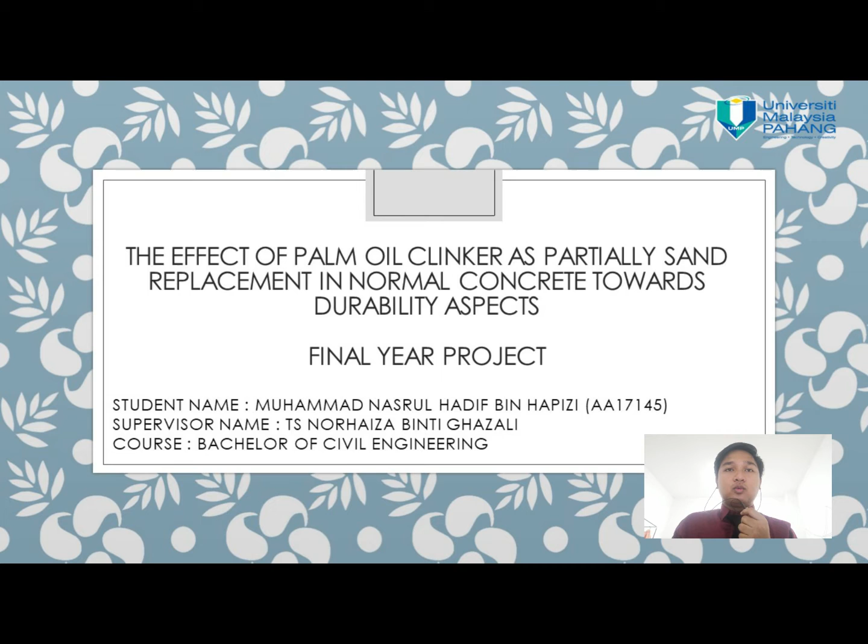Introduction. According to Mineral Product Association, concrete is a composite substance composed of aggregate mixed with water and cement which hardens with time. Commonly, concrete is used because it can improve sustainability performance of building and structure. In addition, R. Gagg explained that concrete is the second most used material after water in the world.

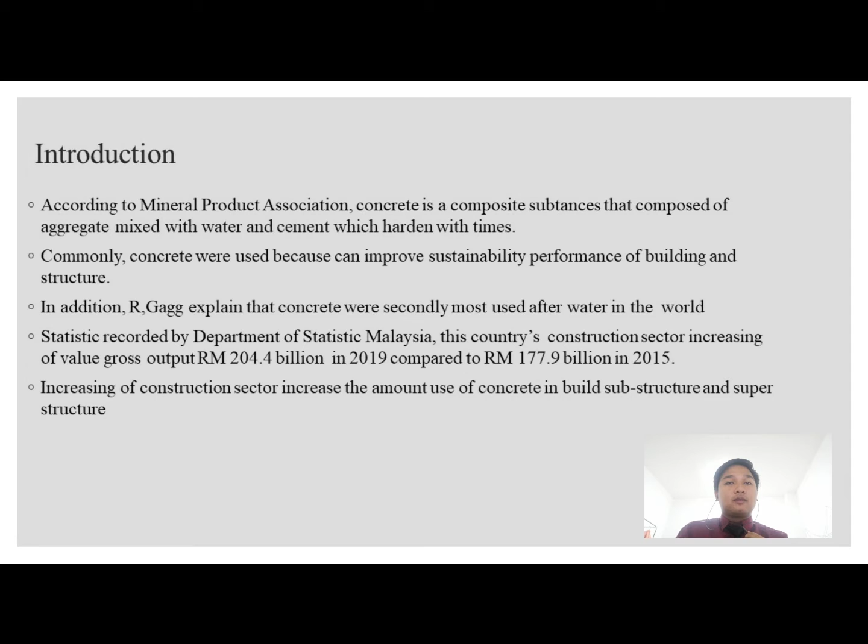Statistics recorded by the Department of Statistics show this country's construction sector increasing in gross output value, with RM204.4 billion in 2019 compared to RM177.9 billion in 2015. Increasing construction sector activity increases the amount of concrete used in building substructure and superstructure.

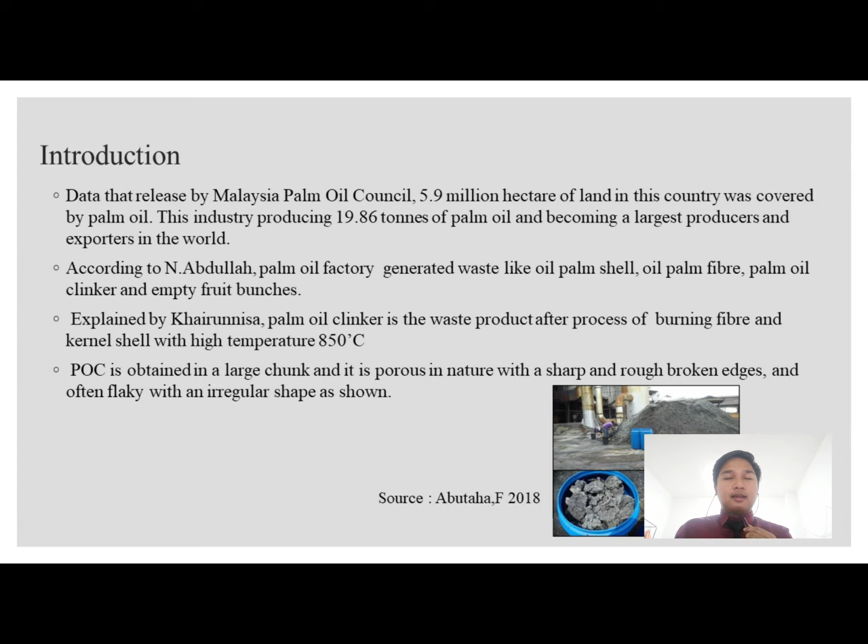According to N. Abdullah, palm oil factories generate waste like oil palm shell, oil palm fiber, palm oil clinker, and empty fruit bunch. Explained by Khairunnisa, palm oil clinker is the waste product after the process of burning fiber and kernel shell at high temperature. I use palm oil clinker as sand replacement in the concrete.

Problem statement. First is mining issue. According to Schandl, between 32 and 50 billion tons of sand are extracted from rivers for supplies around the world, and demand is increasing.

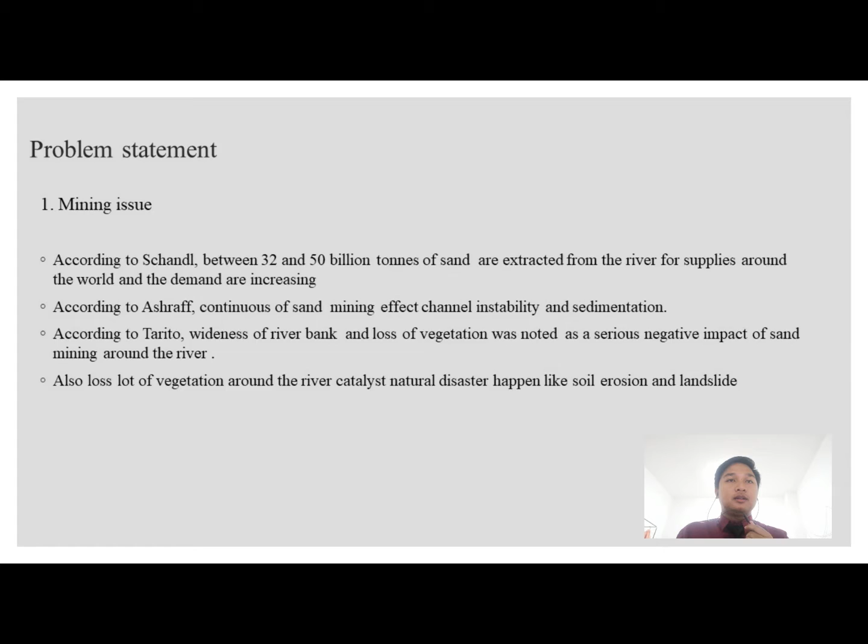According to Ashraf, continuous sand mining affects channel instability and sedimentation of the river. According to Tarito, wideness of river bank and loss of vegetation was noted as a serious negative impact of sand mining around the river. Also, loss of vegetation around the river catalyzes natural disasters like soil erosion and landslide. The second problem statement is the production of palm oil waste.

We can see at the pie chart, the oil palm industry produces 85.5% waste in this country. According to Shekarchin, excessive palm oil waste requires large space of land for storage and dumping. According to Khairunisa, innovation using palm oil clinker in concrete increases clean environment because it reduces waste in palm oil factories.

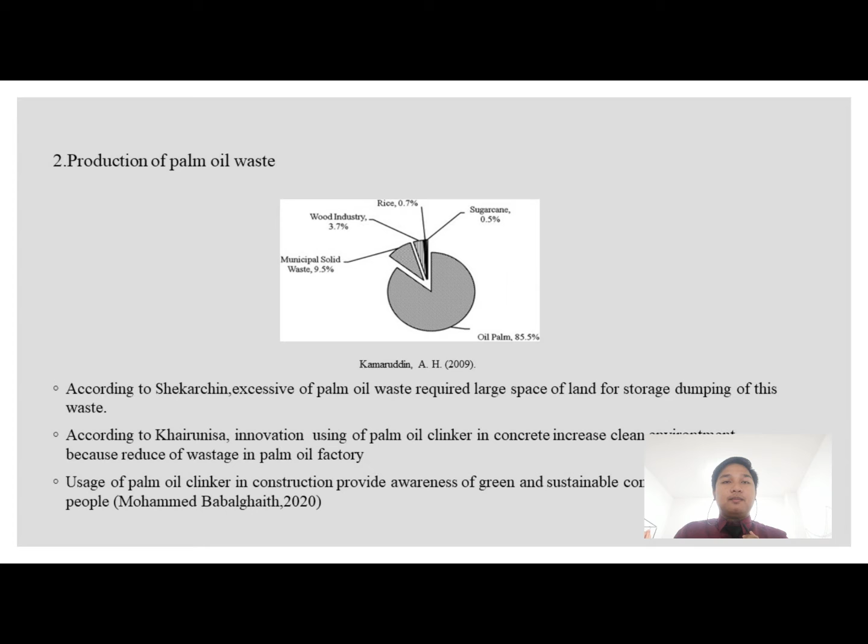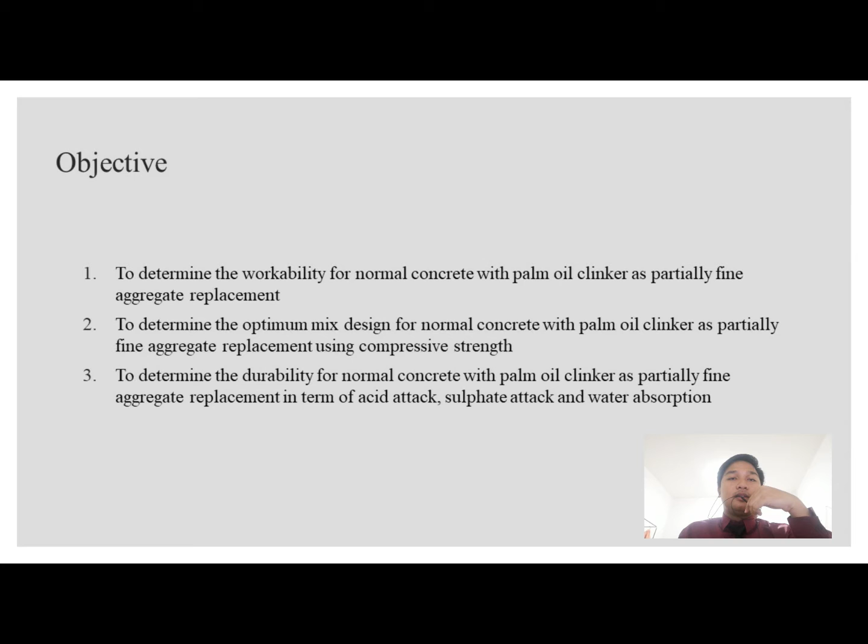My objectives: first, to determine the workability for normal concrete with palm oil clinker as partial fine aggregate replacement. Second, to determine the optimum mix design for normal concrete with palm oil clinker as partial fine aggregate replacement using compressive strength. Third, to determine the durability for normal concrete with palm oil clinker as partial fine aggregate replacement in terms of acid attack, sulfate attack, and water absorption.

according to standard in order to study workability of fresh concrete. Compressive strength test was carried out to determine the strength of the concrete and identify the optimum mix design. Acid attack test will be carried out according to ASTM C267 to determine resistance to acid. Sulfate attack test will be conducted according to ASTM C267 to determine resistance towards sulfate.

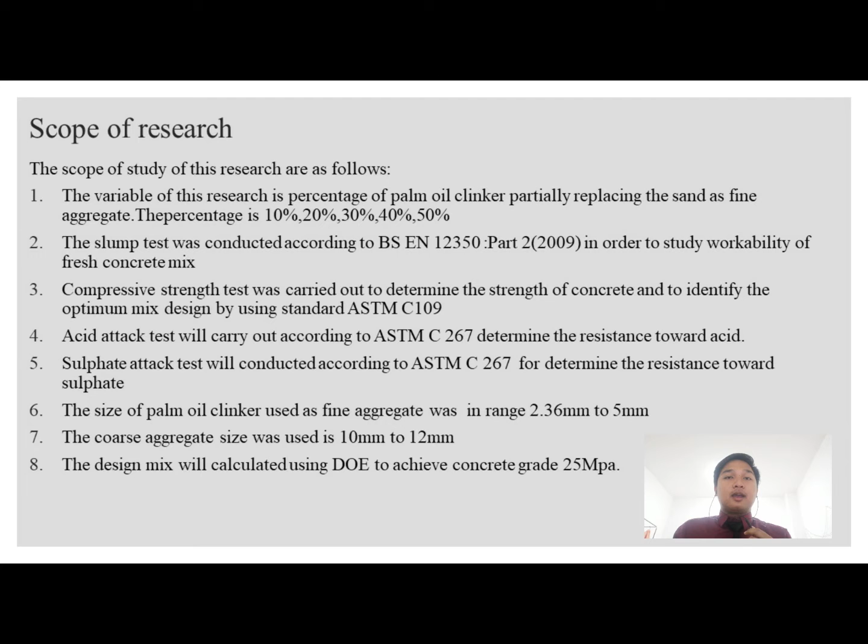The size of palm oil clinker used as fine aggregate was in range 2.36 mm to 5 mm. The coarse aggregate size used is 10 mm to 12 mm. The design mix will be calculated using the DOE method to achieve target strength of 25 MPa.

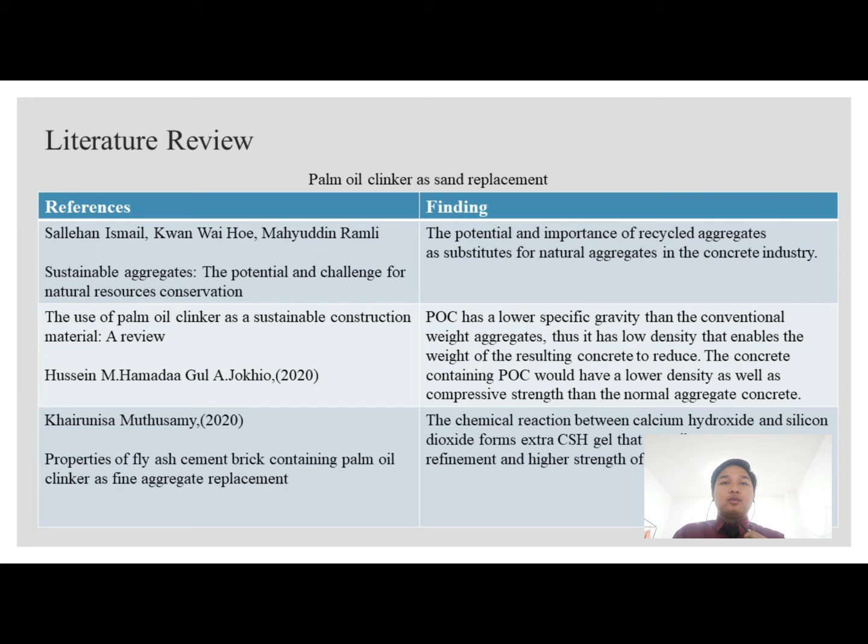Literature review. The finding I get from the literature shows the potential and importance of recycled aggregate as a substitute for natural aggregate in the concrete industry. Second, POC has lower specific gravity than conventional aggregate, thus it has lower density and enables the weight of resulting concrete to be reduced. The concrete containing POC will have lower density as well as lower compressive strength than normal aggregate concrete.

Third, POC aggregate was found compatible to be used in lightweight concrete mix proportion. Fourth, the result also showed the optimal replacement content of fine aggregate with industrial waste was 10% for oven-dried alum sludge, whereas 15% for quarry and limestone, content that improved all strength properties as investigated in this study.

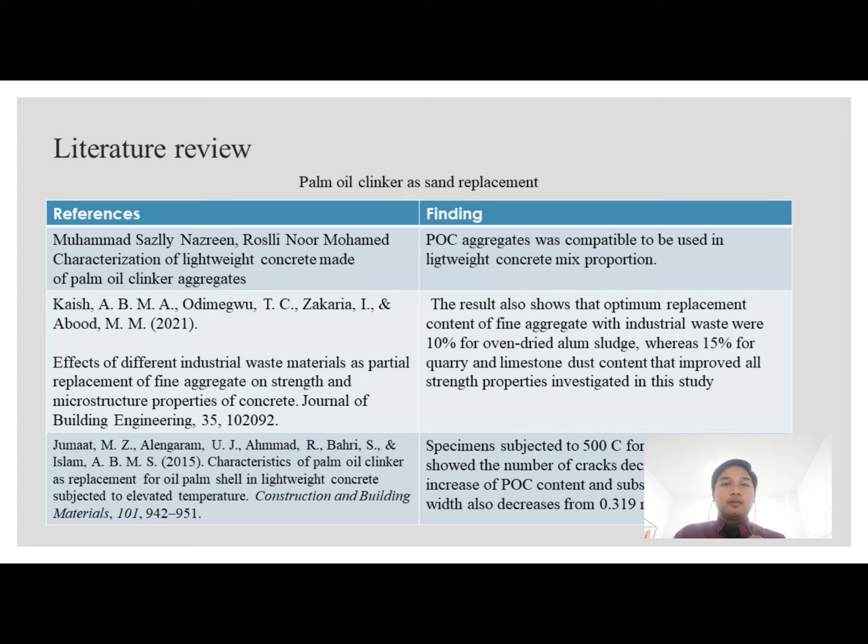For the durability aspect of palm oil clinker, palm oil clinker geopolymer mortar shows great resistance to hydrochloric acid and magnesium sulfate solution. Second, pre-treatment using hydrochloric acid will enhance the reactivity of the palm oil clinker.

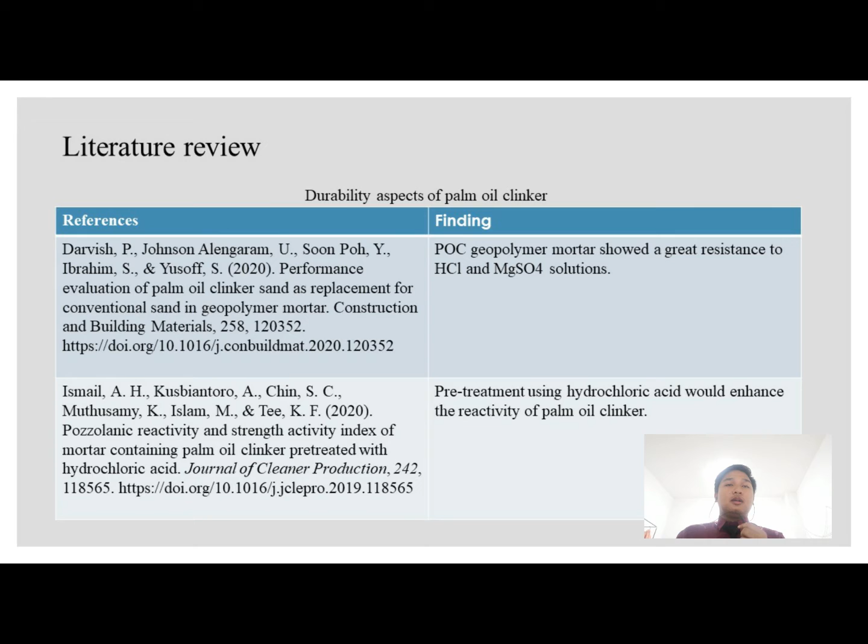Material preparation. For the fine aggregate, I use river sand. For the coarse aggregate, the size of coarse aggregate is 10 mm to 12 mm. The type of cement is OPC cement with brand YTL Orang Kuat. The palm oil clinker size is 2.36 mm to 5 mm, using tap water and the addition of super plasticizer.

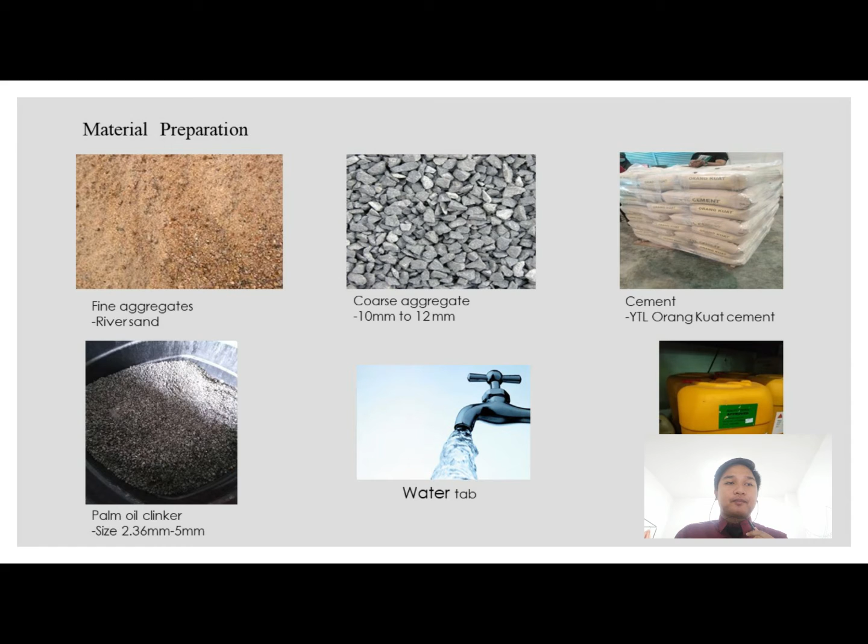Concrete mix design. The concrete will be designed to achieve target strength of 25 MPa by using the DOE method of mix design. The mix design ratio is 1 to 1.25 to 3 with 0.55 water cement ratio. This is a table of mix proportion in kilogram per meter cube.

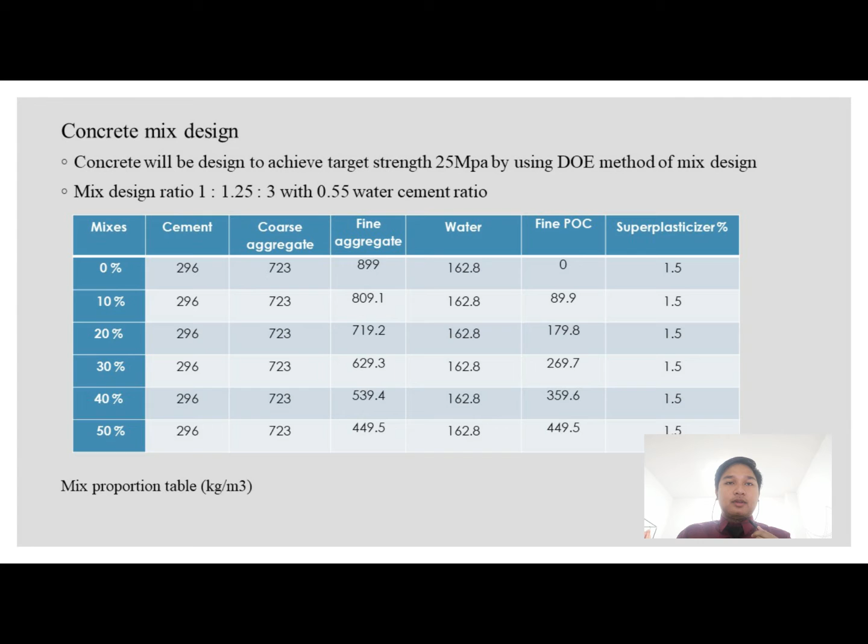This is a list of tests in my research. Firstly, the slump test, compression strength test, acid attack resistance test, sulfate attack resistance test, and water absorption test.

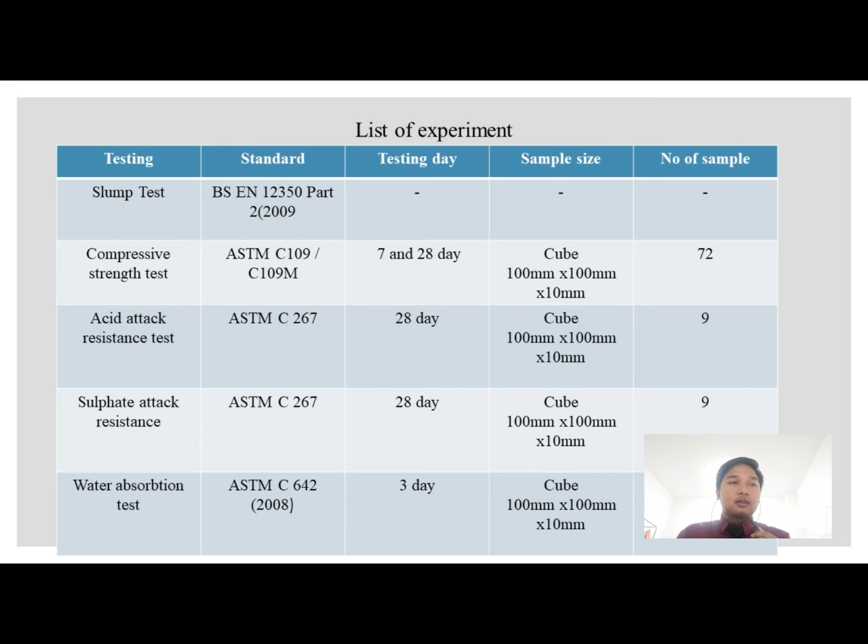The expected outcome: firstly, the expected concrete with palm oil clinker as sand replacement achieves target slump of 30mm to 60mm. The optimum design for normal concrete with palm oil clinker as sand replacement should have compressive strength achieving targeted strength of 25 MPa. The concrete containing palm oil clinker, especially as sand replacement, can provide high compressive strength and good durability to acid attack, sulfate attack, and water absorption.

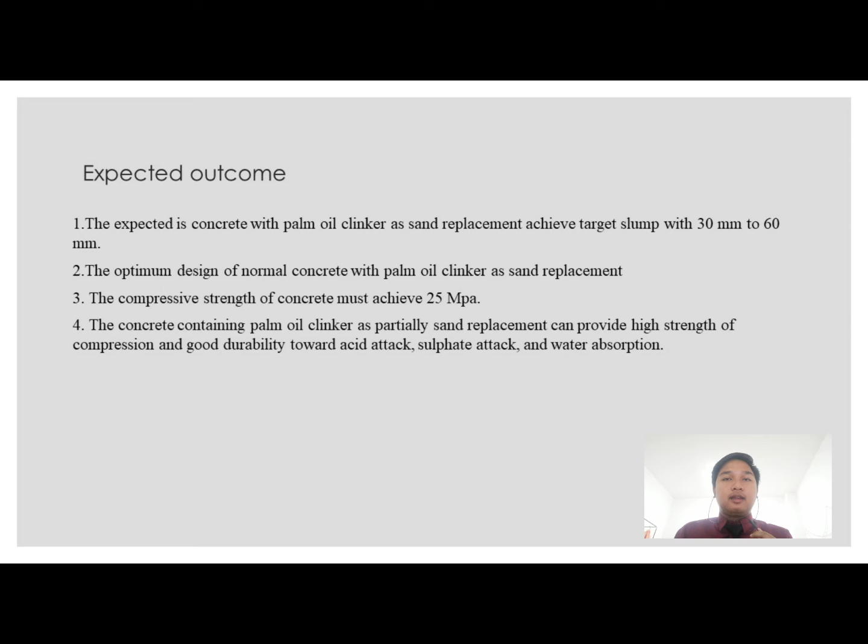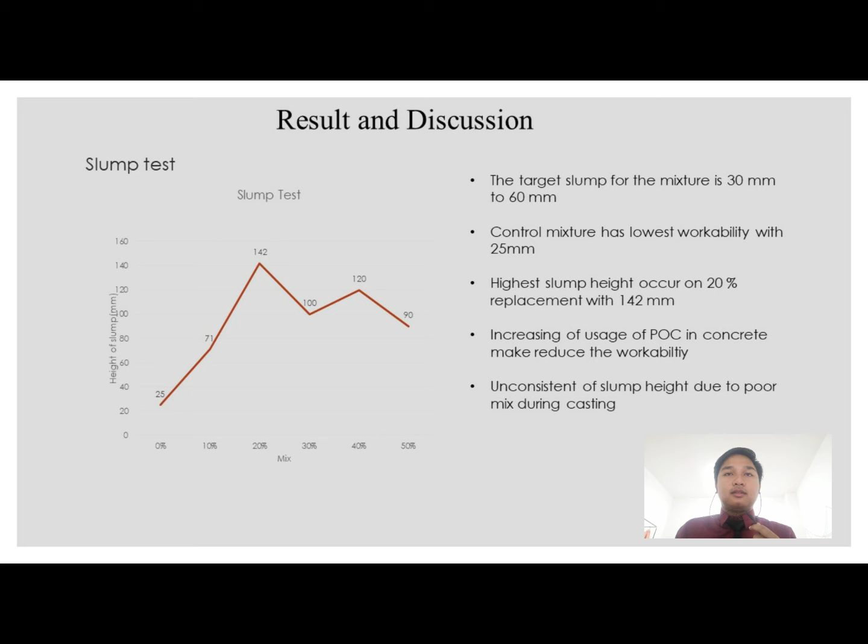For the compressive strength, this is under air curing. For 7-day air curing, the highest strength is on 10% replacement with 40.315 MPa, and the lowest is on 50% replacement.

On 28 days air curing, the highest strength is on the control sample with 45.32 MPa, while the lowest strength is 20.727 MPa on 40% replacement. The usage of POC after 20% replacement in the concrete reduces compressive strength.

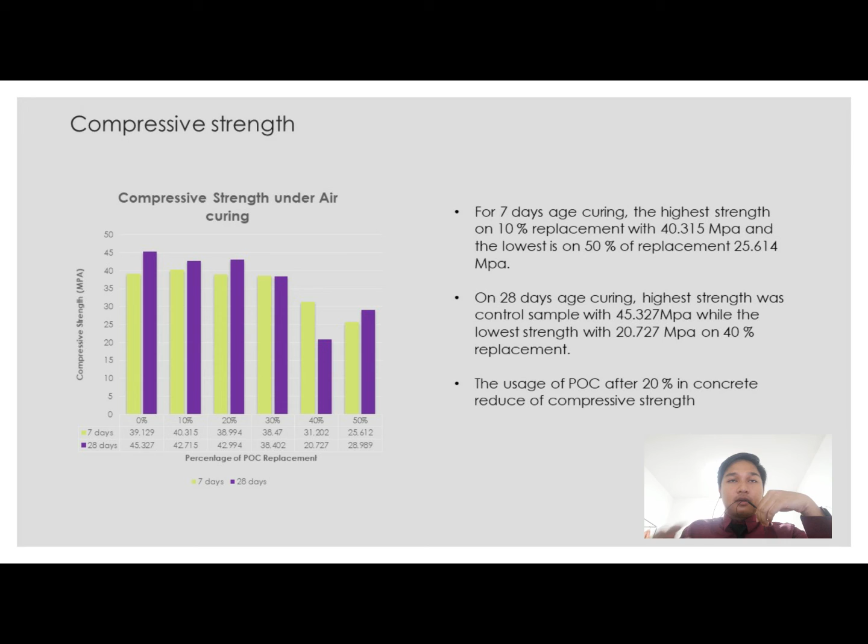Compressive strength under water curing: for 7 days water curing, the highest strength is on the control sample with 40.634 MPa, and the lowest is on 50% replacement.

For the 28 days water curing, the highest strength is on 20% replacement with 43.522 MPa, while the lowest strength is on 50% replacement with 27.312 MPa. The compressive strength is reduced after the mixture contains more than 30% POC in the concrete.

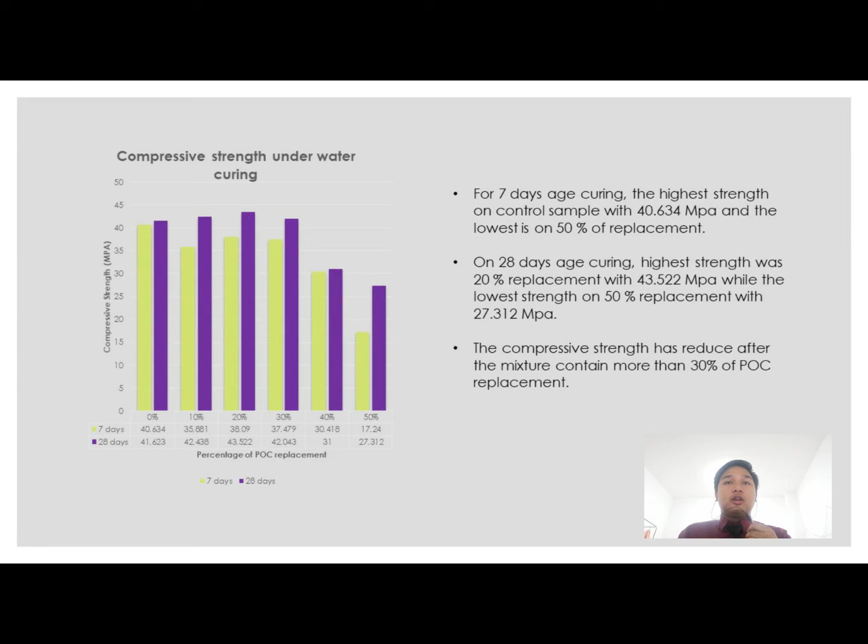Water absorption: for the 10% replacement, the lowest percentage of water absorption was recorded at 1.92%. The usage of palm oil clinker is good compared to normal concrete because the rate of water absorbed at 10% replacement is lower than normal concrete.

Excessive usage after 10% replacement of palm oil clinker increases the water absorption rate in the concrete. We can see the water absorption percentage increased after 10%. The 20% replacement recorded 2.14% water absorption.

The results show sand has absorbed more water than palm oil clinker, from the comparison of 10% palm oil clinker and 0% palm oil clinker.

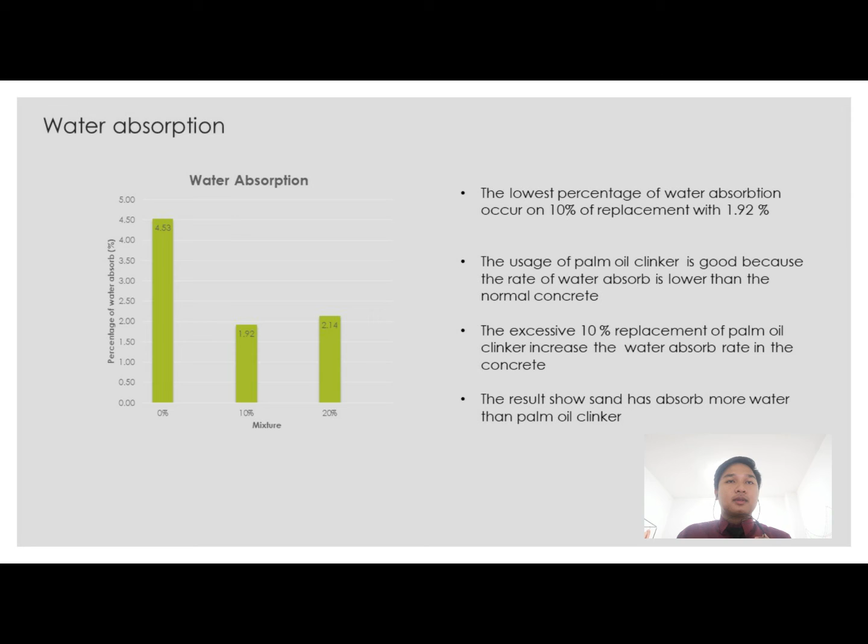Next is the acid resistance test. Acid resistance test was compared with two variations: firstly on weight, and second on compressive strength.

This graph shows the percentage of decreasing weight. All mixtures had mass loss after reacting with acid. The lowest rate of mass loss is on 10% replacement with 0.470% decrease in weight.

This is good compared to normal concrete, because the normal concrete recorded the highest percentage of decreasing weight with 0.740%.

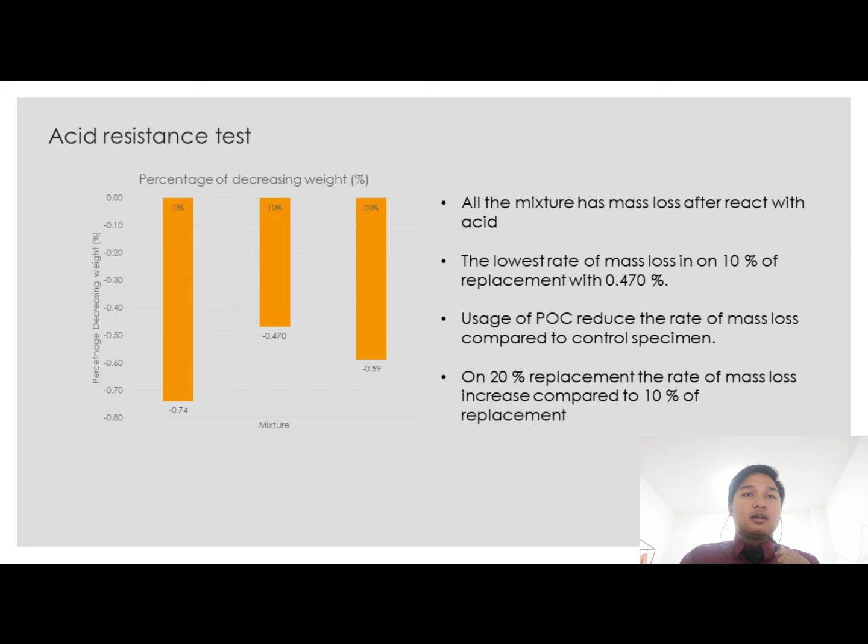Variation in percentage decrease of compressive strength: the mixture shows a decrease in compressive strength. From the results, 10% replacement showed the lowest percentage decrease in compressive strength, at only 3.52%.

Compared to the normal concrete, the normal concrete recorded a 16.408% decrease in compressive strength. I can conclude that usage of clinker reduces the percentage decrease of compressive strength.

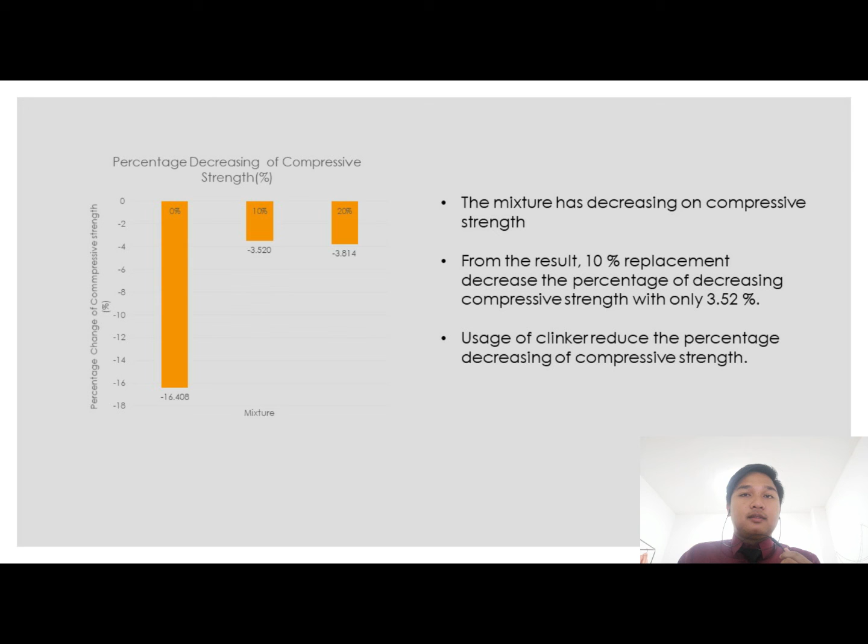Sulfate resistance test: all mixtures increased in weight after 28 days immersed in magnesium sulfate solution. From the graph we can see all samples recorded a change of weight. The change of weight was positive because the concrete gained weight, compared to the acid resistance test where there was mass loss.

The increment in the mass of the concrete is a result of ettringite formation which fills the pores of concrete and increases concrete volume. More porosity when more POC is used in the concrete affects the rate of change of mass. We can see the normal concrete shows a lower percentage of weight change compared to the palm oil clinker replacement.

The normal concrete recorded 1.61% change of weight. 10% replacement recorded 1.98% change of weight. 20% replacement recorded 2.33% change of weight.

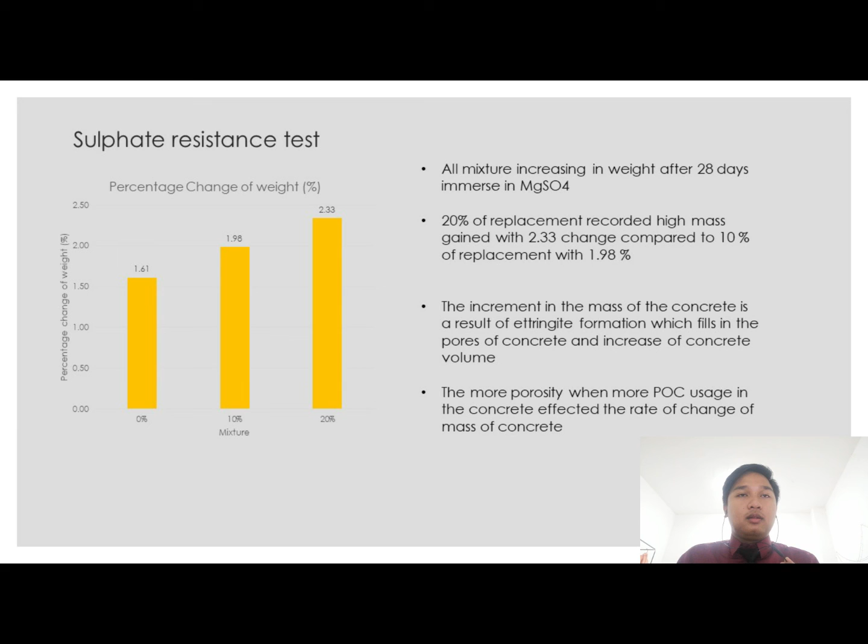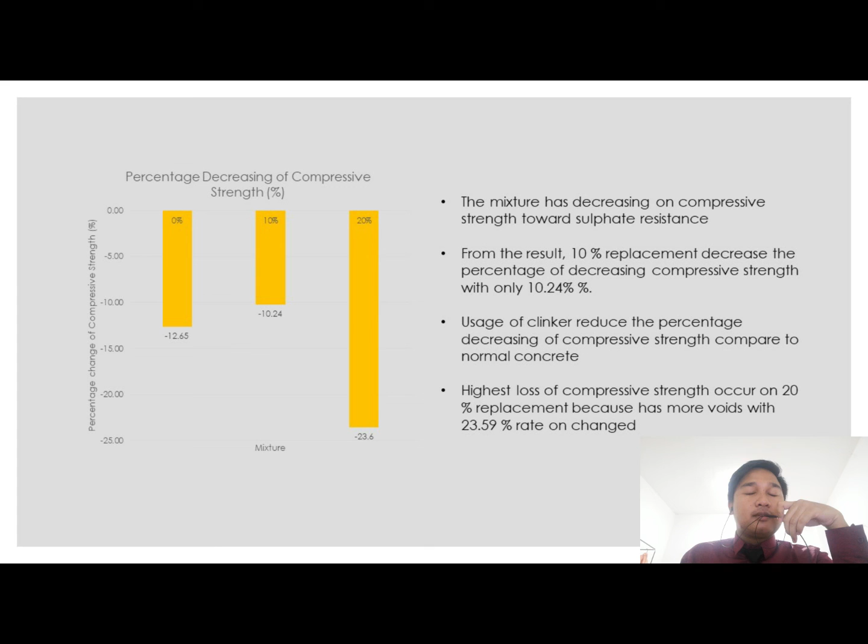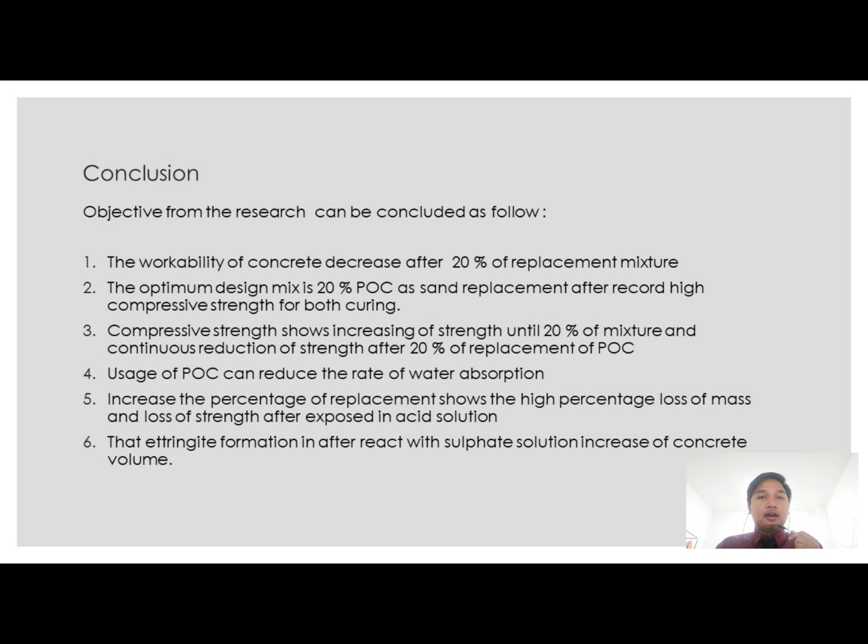Increasing the percentage of replacement shows a high percentage loss of mass and loss of strength after exposure to acid solution. The last point is that ettringite formation after reacting with sulfate solution increases concrete volume.

For the recommendation: conduct a series of studies on the workability of different types of POC as sand replacement in concrete; conduct study on the compressive strength of different types of POC as sand replacement in concrete; and investigate the durability of concrete containing POC as sand replacement with different sizes.